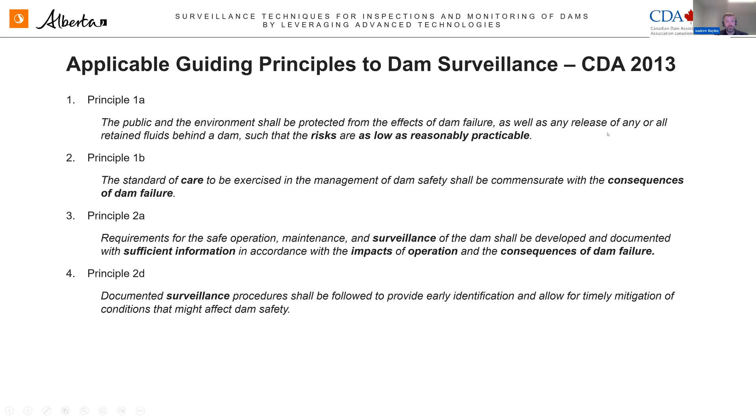So in terms of current surveillance practices, obviously there's a lot of documentation available within the industry. Because we are talking about this from the context of Alberta dam safety, we do tie back into the Alberta Dam Safety Directive, and also the Canadian Dam Association guidelines and the relevant technical bulletins as well. There's also the ICOLD documentation, which is ICOLD Bulletin 158, which provides a lot of really good content. And there's a lot more documentation out there, like Monitoring Dam Performance, which was an ASCE document, and various other bits and pieces.

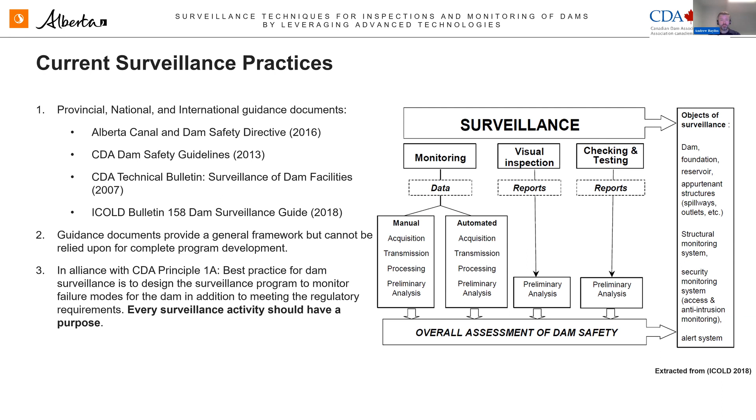So in terms of continued improvement in surveillance practices, they obviously need to be improved upon. There is a need to increase information in the project database as the project evolves. There will always be new issues. There will always be new failure modes that could be identified at any time. And we also want to reflect the fact that there are many dams in Canada, in Alberta and throughout the world as well, which are reaching the end of their design life, and they are aging infrastructure. They are aging assets that require continued surveillance, improvements in technology, and so forth.

And as we recognise, improvements in technology are being undertaken on an ongoing basis. Even in my last 20 years of experience, the leaps and bounds the industry has made has been pretty remarkable. And it's obviously going to grow even more when we move into more artificial intelligence technologies. We have more processing power, we have more digital technologies as well. And obviously the scale of these technologies moves into a more usable and more palatable scale. And next slide, please.

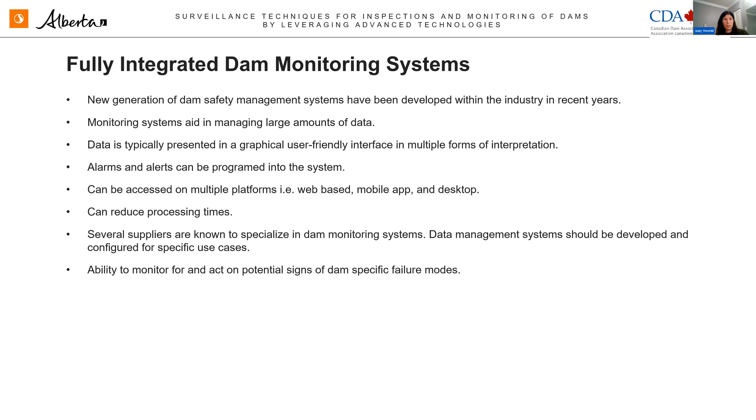So there are several suppliers that are known to specialize in dam safety monitoring systems, as Andrew mentioned, we're software neutral. The important thing is that the data management system should be configured on an individual basis for that dam's identified failure modes, the dam history, the construction, all that information for what you're doing. And then you also have the ability to monitor for and act on potential signs of failure modes. And these systems can also be developed on an individual basis and built in-house. You just need the correct IT support.

So a little bit on digital inspections. Having an experienced dam safety professional's eyes on the dam is a critical component in dam surveillance, and it really forms the effective backbone of a dam safety management system. Inspections and surveillance were discussed heavily on a CDA webinar that took place in February 2021, so I'm not really going to get into the details because that webinar is available online.

You can set up the forms to walk you through each step of the inspection. If you have multiple dams, different dams can be set up with different forms, so you're walking through the same thing every time. If there's any identified seepage issues at a known dam, you can incorporate that into the inspection sheet and say, this is what we need to check. You can also set it up to have automatic calculations. If you're taking a water level reading, you can set up automatic calculations.

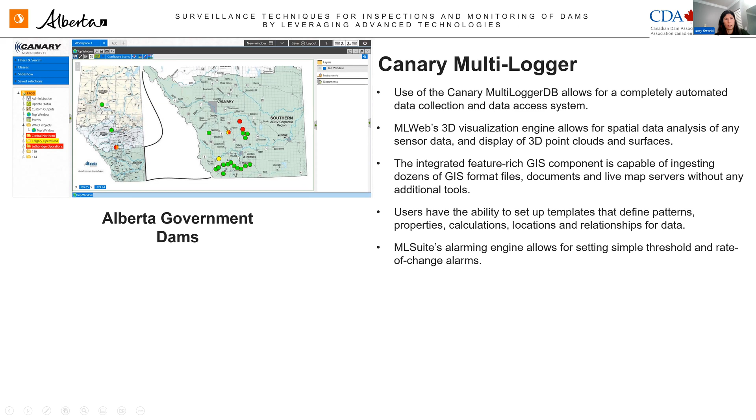You can then point and click right into a specific dam site, and you're really getting that 2D or 3D visualization of the dam right on the spot. We can see here that we have instruments installed at the emergency spillway and fuse plug, the spillway itself, and the embankment. We can also see that red mark on the embankment, which would indicate that there's an instrument within the alarm levels in that area.

We can also click right into the spillway area and see the exact locations of those installed instruments, and they are color coordinated, where the blue titles represent pore pressure monitoring instruments, and the red titles represent deformation instruments.

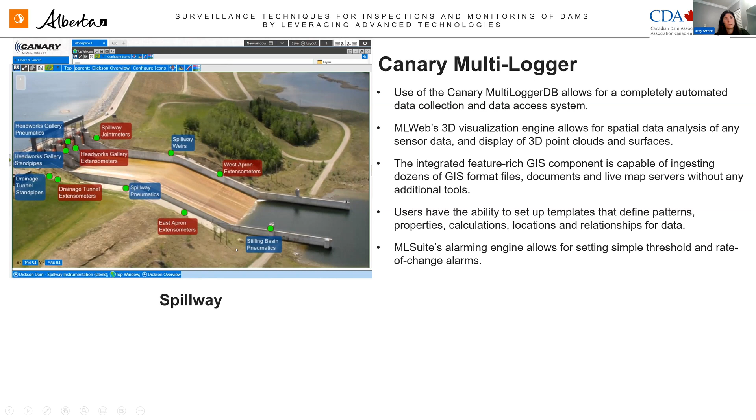And then, as I mentioned, there are multiple forms that we can set up for that graphical review of the instrumentation. We can visualize them grouped by cross-section, by area or by type, depending on how you want to interpret that data. So you can really interpret data in different ways that maybe you weren't doing before.

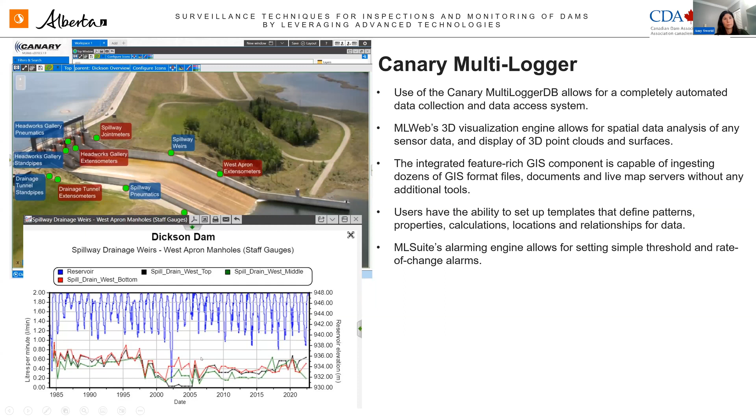So DAMSat. DAMSat is a monitoring software which provides regular dam monitoring using satellites. It uses a combination of InSAR and GNSS to monitor movement. And also there's in situ displacement sensors to really monitor those abnormal behaviors such as movement or seepage. It also includes optical satellite data with pollution indicators.

And it can also incorporate 10-day weather forecasts, which can be tied to the hydrological numerical models if they're incorporated into the system. So you can really assess if there is a big storm coming. You can actually have that in the system. It will get the forecast and go into the numerical model, and you can assess what the downstream levels would be in a potential failure. So it's a really unique tool.

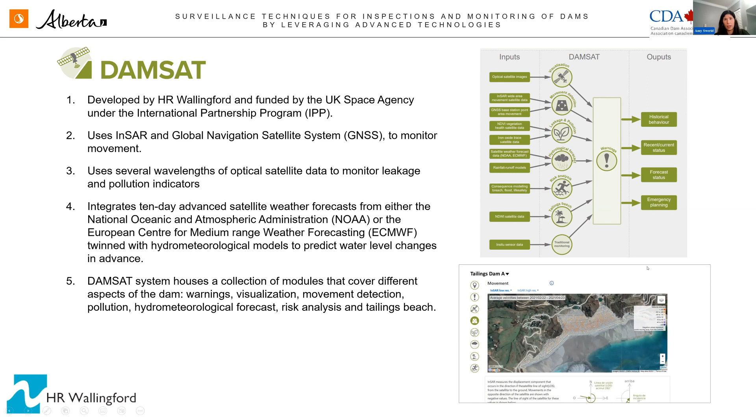The interface does include a number of modules, which are shown on the screen above here. So if you were to log on, you would get the general information, alerts, visualization, movement detection, the pollution indicators. You would look at the hydrometeorological forecast, and then you can also tie into emergency planning as well.

Okay, now I'm going to get into a little bit of topographic mapping technologies. So there's been advances in topography mapping in recent years that can really provide deformation monitoring in ways that we were not previously able to. We're able to get increased resolution and precision using these technologies, which have the capability for us to assess the detailed displacements over a large area as well. And we can also have scans that are carried out at increased time intervals for increased levels of monitoring.

So today I'm going to discuss various types of new topographic technologies, and it's definitely not a conclusive list by any means. I'm not a saleswoman. I'm not going to get into any of the major details on these technologies, and we are very neutral on anything that I'm going to be presenting. But I just want to go over some of the main points of some of the available technologies to maybe give you an idea of something you may or may not have heard of before. And then you can think if this is a technology that you might be able to use at a project in your dam to lower the risks.

So satellite InSAR is a remote sensing technology which is capable of measuring ground displacements with 1 to 2 millimeters precision per year. It has longer wavelengths, which allows the signal to penetrate through cloud cover, fog, rain, or dust. However, snow cover limits the effectiveness of the scanning. Because it measures along a line of sight relative to the satellite orbit, it can have restricted detection on steep slopes. So that's something to keep in mind if you are planning for a dam inspection. And it uses a SAR technique to measure displacements over 2 time periods.

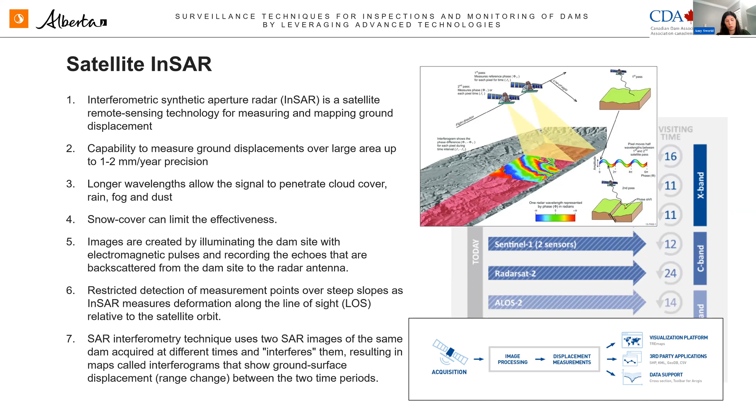So 3VG is a proprietary InSAR system, which is capable of remote monitoring millions of data points in near real time. I'm not going to get into all the details of 3VG, but you can see the image of the platform on the sidebar here. And also they have experience carrying out inspections and topographic mapping for a lot of dam projects. You can see an example here of an embankment survey.

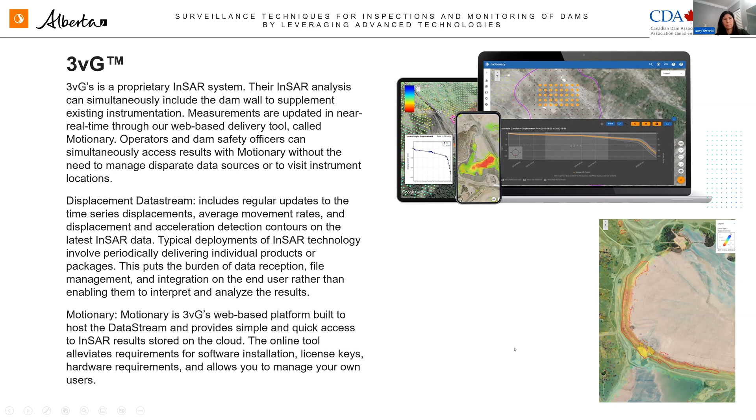So ground-based synthetic aperture radar is a remote imaging system which is capable of obtaining deformations that are less than 1 millimeter, and it's proven to be a reliable remote sensing tool. You can see the setup on the side here. So you would have the radar sensor, the scanning rail, it would be connected to a power module, and then you would have the laptop available for data acquisition.

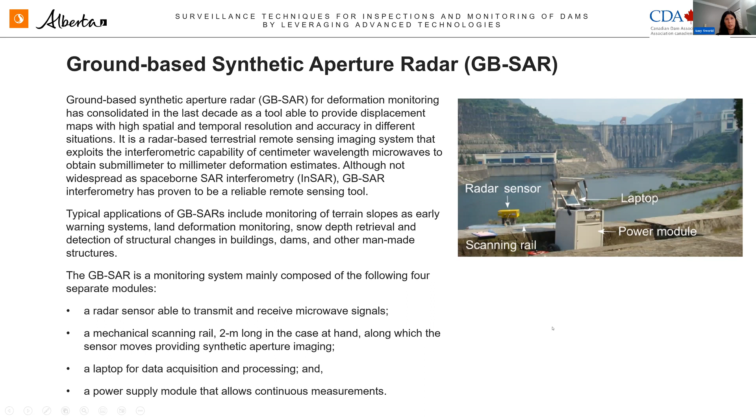Terrestrial laser scanning. It's a contact-free measuring device, and it does require an unobstructed line of sight to carry out the survey. So to carry out a survey for a dam site, you typically need to set up this laser at multiple vantage points around the site, and then the scans would be combined from each vantage point and referenced in spatial coordinates using survey points. And then it also has built-in cameras to allow for automatic texturing. So using the geographic coordinates and the photographic scanning, you really can develop a nice 3D model.

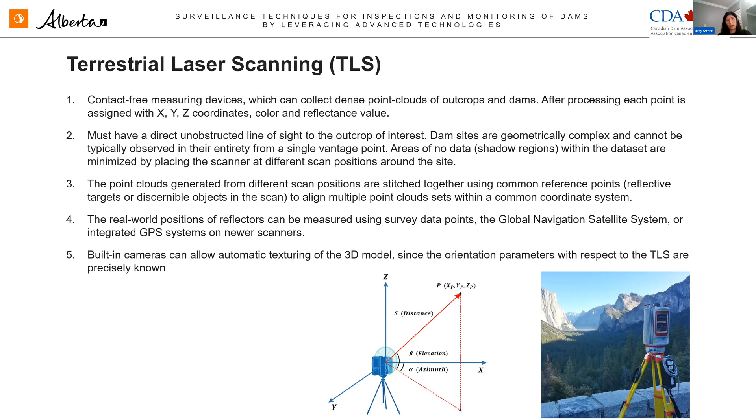So structure from motion is a unique tool that utilizes a series of 2D images to create a 3D component. The images are overlapped from multiple positions using a photogrammetric workflow. And the images are first undistorted using key point detection, which is used to identify key features such as a bedrock outcrop. The key points are matched and created as discrete points in 3D space.

And then there's a distribution of key point matches, which is used to calculate the position and orientation of each image in 3D space. And then those matches are projected to create a 3D visual model. So I have an image here that I found in a previous paper of the 2D to 3D SfM output. So it's a really unique tool that can be used in dam surveillance.

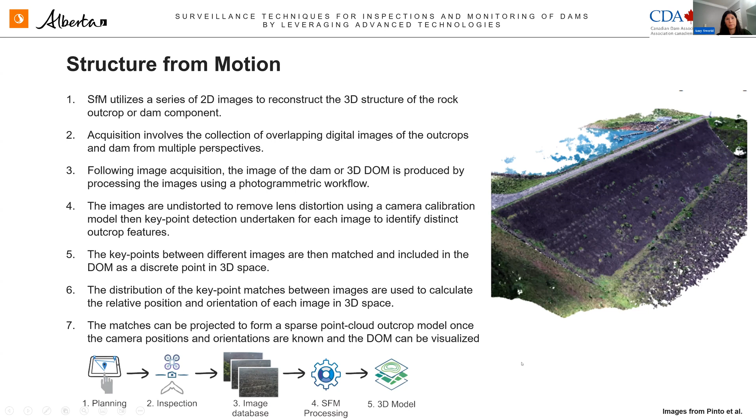So unmanned aerial vehicles. So UAVs, they're becoming more and more common, not only for professional use, but also in recreational use. But they can be incorporated into dam inspections to inspect remote or restricted areas. And then they can incorporate laser scanning as well to develop a DEM. They really allow for a more detailed review of the inspection.

So if you're having a flyover inspection and you have that video on record, you have that record and you're getting the full site. So if you're carrying out a walkover inspection at a later date and you notice something that is different, you can always go back and see that right on the spot. And it's a cost-effective technology as well.

To carry out an inspection for a large dam, you can typically carry it out on a 2-hour survey. And then the cost will depend on the drone that is used, but costs that we're seeing are typically $1,000 to $3,000, including data reduction, to have a survey done. And the cost depends on the area and the drone used, but it's still really cost effective.

The photos that I have on screen are just photos of an active construction site for a dam in Alberta that we're working on. We're having weekly surveys with drone photogrammetry carried out that are tied to control points to develop a point cloud model. So having that point cloud model, we can develop a DEM, which we can then use in AutoCAD. So it's a really effective tool for weekly progress tracking.

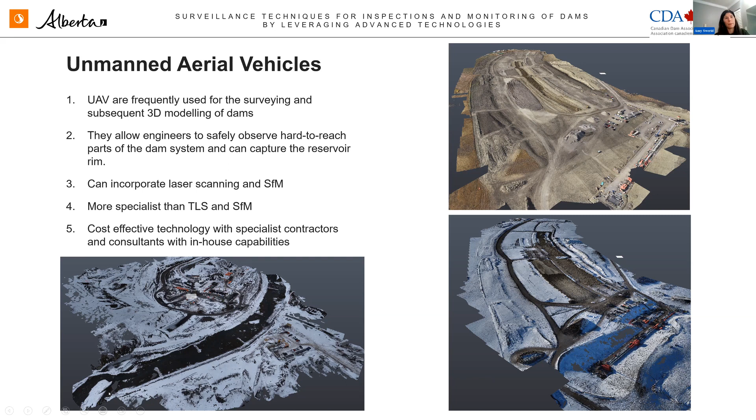So AutoSpecs, it's a proprietary damage assessment software. It uses acoustic frequency data to automatically map and quantify damage such as cracks, spalling, and delamination. It allows users to visualize and assess defects over time. It uses a series of optical imaging, infrared imaging, and acoustic signatures that are able to look for defects that are up to 1 millimeter, 50 millimeters, and 200 millimeters into the concrete. So you can get that into-the-concrete data to assess.

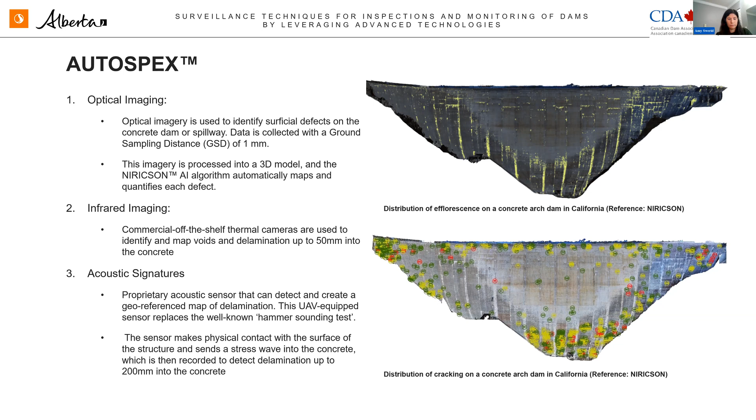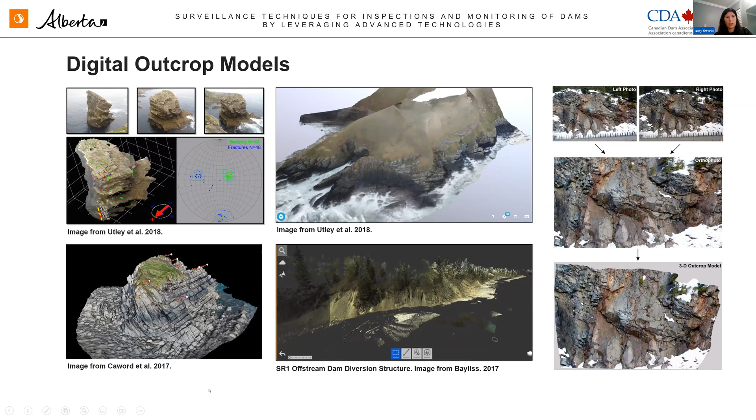And with that, I am going to hand it over to Amy Snedden to talk about instrumentation. Hi, so good morning, everyone. If you bear with me while I try to share my screen. There we go. Hopefully everyone's seeing it now.

Okay, so I want to start just with a brief discussion of instrumentation. This was previously discussed at fairly great length by Savannah Herman of Terra Insights in the 2021 webinar that we've referenced a couple of times. But today I do want to focus on two advanced monitoring options that are available right now to monitor for deformation and seepage. And these are the shape accelerometers and distributed temperature sensing systems.

Okay, so first with the shape accelerometer array, or the SAA. So for anyone who's not familiar with this product, it's essentially an update to the traditional slope inclinometer that I think most of us would have used at some point in our careers. Where it really differs though, is that with the slope inclinometer, you would go out, you would lower down the reader instrument and get that one discrete data point on that one day. With the SAA, you actually get real-time monitoring information, both of horizontal and vertical deformation. But one of the really cool applications for it is that you can also apply it in an arc for monitoring of something like convergence in a low-level outlet.

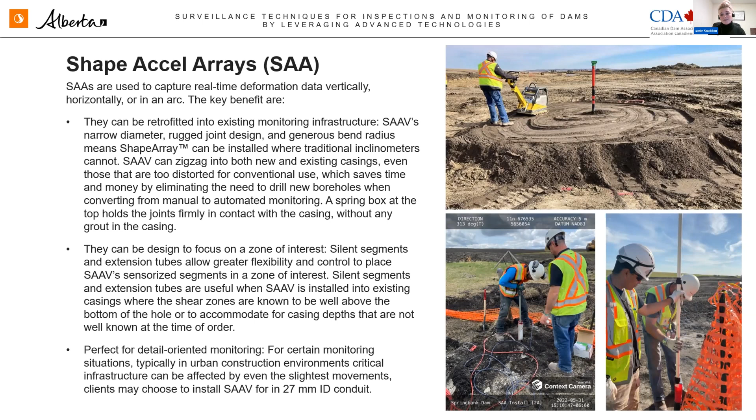Okay, so on to a seepage monitoring system that uses advanced technology, and that is the distributed temperature sensing system. So DTS works using lengths of fiber optic cable that are trenched within the ground and are able to detect variations in temperature. So these cables can be up to 90 kilometers in length from one hub, depending on the system that you are using. The length does vary, so I would encourage you for your individual uses to connect with an individual supplier to figure out which system works best for you.

But the system works using the principle of the Raman effect, where wavelengths are influenced by external forces. In this case, we're looking for changes in temperature, so it's temperature that's influencing that wavelength, which is then picked up by the system. So it can accurately identify very small variations in temperature. The manufacturing information suggests it can go as low as 0.01 degrees centigrade, so incredibly sensitive. And then it can locate those changes at a very precise location along the fiber optic cable.

But why do we care about temperature variation? So the unique thing with this is the product is using temperature variations to correlate to seepage flow. And this has been successfully used across many dams in Europe and has been adopted in dam monitoring guidelines in Sweden. I have been talking to some manufacturers recently for possible application to a dam in Alberta, but as far as I'm aware, there aren't any earth-filled dams in Alberta that currently use this technology, although it has been applied to mining sites for leakage detection.

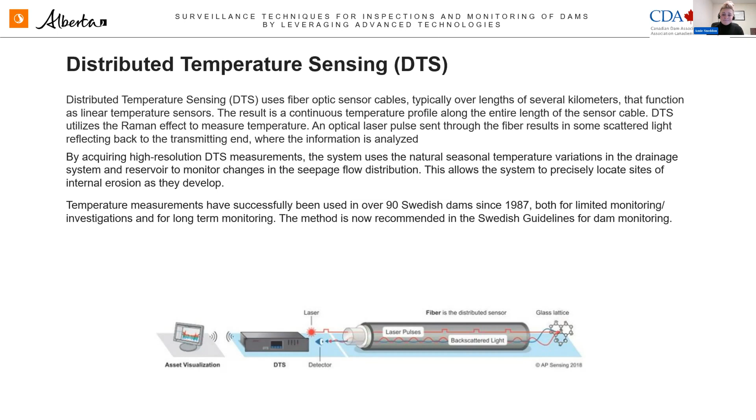Okay, so building on DTS technology, Sensornet have also now developed a special purpose optical cable for dam monitoring, which is the distributed temperature and strain sensing system. So it's kind of in the name, but as you can imagine, the cables are monitoring for both change in temperature and change in strain. So it's doing this by using 3 separate measurements: temperature compensated strain, strain without temperature compensation, and dynamic strain distribution.

And it's taking these readings based on the same principle as I'd mentioned before, where an external force is impacting wavelength. In this case, it's looking for strain and temperature. So the changes in strain are then used to estimate deformation along the fiber optic line. And these cables are limited to around 10 kilometers in length, although I do believe that Sensornet are working to increase this coverage. There have been 2 successful trials of the system completed in Sweden that were reported on some case studies in Sensornet's website.

And I would encourage people to read those case studies. They are incredibly interesting and give a good background on the product. But the first of those 2 trials was unsuccessful. I think there was some damage to one of the cables and the strain sensing wasn't operational. So some tweaks were made to the system. The cable was made more rugged. And then the second trial was a success and predicted movement and seepage in line with existing instrumentation on the site. And it is considered appropriate for use in earth-filled dams now.

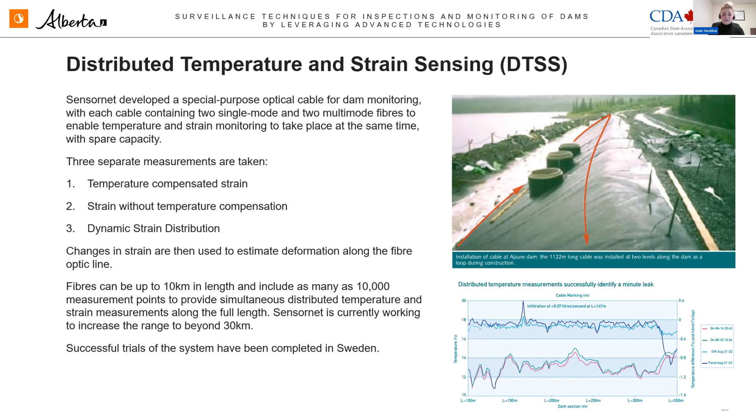Okay, so a data management system that's related to the DTS is XCT. So this is a product which, similar to the ones Amy discussed, are exporting real-time data from site and then presenting a visualization of that data. So it presents both a visualization of the temperature and of the interpreted flow data. So I think that's the key piece with this one, is it is showing that interpretation of data. So the live data can be reviewed with no need for mobile equipment or anything. It can be used via a web interface.

So there's no need for investment in any additional equipment other than the installation of the DTS system itself on your site. One of the nice things is that data from XCT can be exported into an existing data management system. So say if you're using something like Canary on your site, you can export data from XCT into Canary so that you can see all of your instrumentation data in one place. As with something like Canary, you can also set alarm levels in XCT so that notifications can be sent to the appropriate people and the proper procedures can be put in place.

And that brings me on to, I think, a really interesting discussion point on DTS and DTSS systems. As I mentioned earlier, we don't have any installed in existing dams in Alberta, as far as I'm aware, and I think one of the key reasons for that is constructability. So as you can imagine, because it's a length of cable, there does have to be some level of trenching involved to install this system.

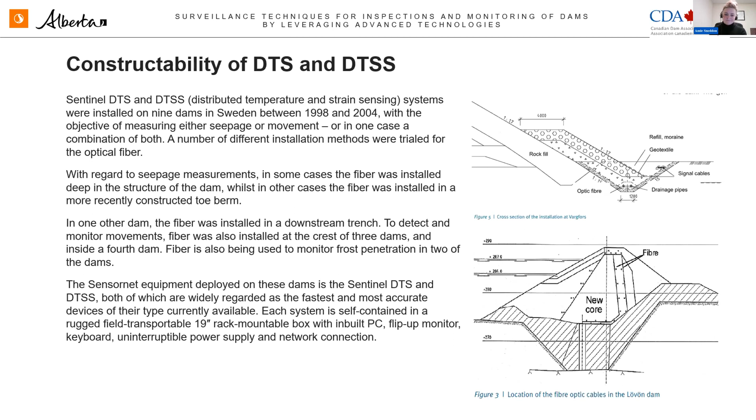Okay, so looking to the future of advanced technologies, as Andrew mentioned, we're really in the early stages of adoption for artificial intelligence, but we have seen some advances recently that are applicable to dam engineering. And after I've given a general overview of what artificial intelligence is, I'll get into that.

Okay, so I feel like this is a subject that when we say artificial intelligence, it's not abundantly clear what we're talking about. So I just wanted to give a brief description of what we're generally referring to. So artificial intelligence is a computer system that's able to perform tasks that normally require human intelligence, such as visual perception, speech recognition, decision-making, and translation between languages.

Where we're seeing applications of artificial intelligence right now is typically the subset of AI, machine learning, and that studies computer algorithms that improve automatically through experience. So some examples of that we'd see in the world right now would be things like self-driving cars or the assistants that we have on our cell phones, such as Siri. So one example I did find that wasn't directly applicable to dam engineering, but is somewhat dam engineering adjacent, is what NASA is doing with AI right now.

So NASA is using AI and machine learning to sift through years of data and imagery to rapidly and efficiently find relationships that would be impossible for the human eye to detect. It's also sorting through years' worth of data in a short span of time, which would really be impossible for a human being to do.

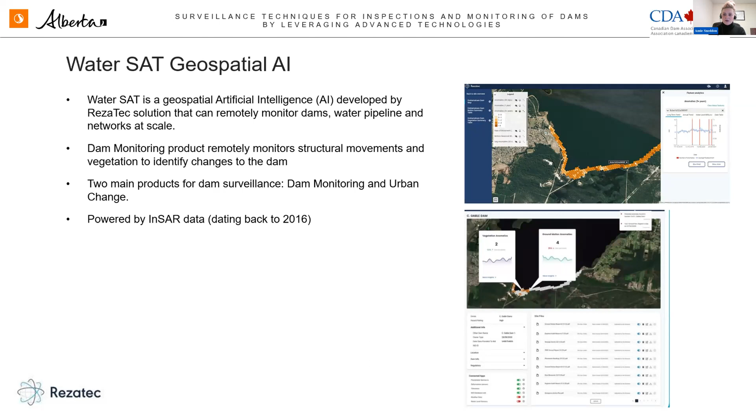The first is drone photogrammetry. Sorry about that. Good enough. Is it being utilized for quantity survey work on the active dam site?

And any of you can jump in. Maybe you want to turn on your cameras and audio. I can answer this one, Jenna. All right. So yes, it is.

We've been using drone technology extensively throughout the project. We use it to define the quantities, check quantities. We reference this consistently with what the contractors are giving us. And we use it to derive quantities for payment and so forth. There's other applications as well, but for the purpose we're using it on that project, it's served its function and has made our cost estimation and our cost progress estimates a lot more streamlined than in the past.

Okay, thank you. The next question is about the monitoring systems. Are they effective for snow-covered dams in wintertime? I think I need a little bit more information on the question. It would depend on the sensor type. The monitoring system in the sense of database management, that would be reliable year round. And in colder climates, you would obviously have batteries that you would have to be checking. As for snow cover, it kind of depends on how you're carrying out the survey. Some methods would be and some methods wouldn't be.

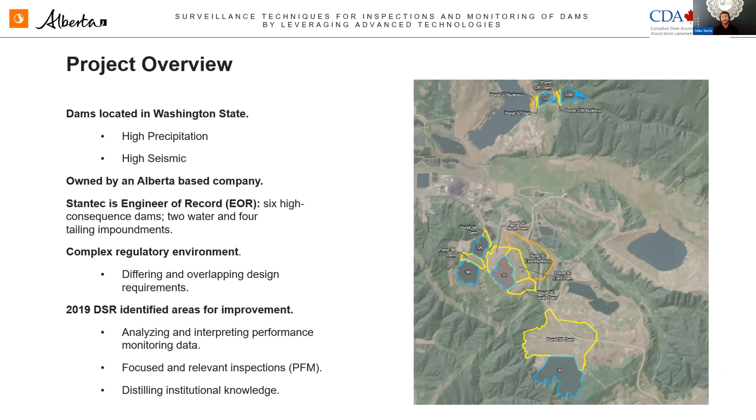So in 2019, we completed a dam safety review of the dams on the site and found a few areas for improvement: analyzing and interpreting performance monitoring data, focusing the inspections on relevant items, potential failure modes, and distilling institutional knowledge. So on this next slide, we'll take a little bit of a deeper dive into those challenges and opportunities that we've identified over our kind of 3-year tenure in this project so far.

So really, our opportunities for improving the dam safety program at TransAlta Centralia were getting these inspections focused on the potential failure modes. The regulator had stipulated the inspections to occur at a frequency, and the regulator was very comfortable receiving just a very broad stroke of inspection, a few yes or no questions, but really not digging into the details of what the failure modes were, why we were looking at certain things. So we wanted to revamp the inspection program to really get into those details, so that we could start understanding dam performance at a deeper level.

We wanted to decrease the time between observation and action. Doing a lot of paper workflows has the opportunity to introduce error at several iterations. So we're going out in the field, we're collecting data on paper, we're coming back to our offices, we're transferring that data into a spreadsheet, and then possibly from there, we're even transferring that data to other stakeholders and consultants who are then transferring that data again into their own spreadsheets. So we're looking at 4 or 5 touch points for any given instrumentation data or inspection data that's coming out of the field. We wanted to decrease the opportunity for errors to be introduced there. That also helped us to decrease the time.

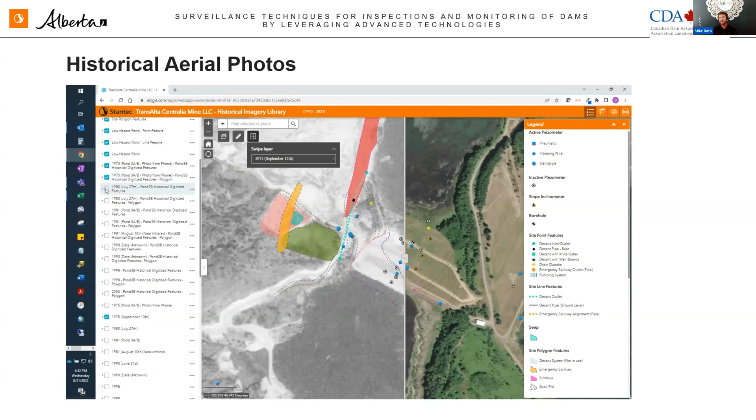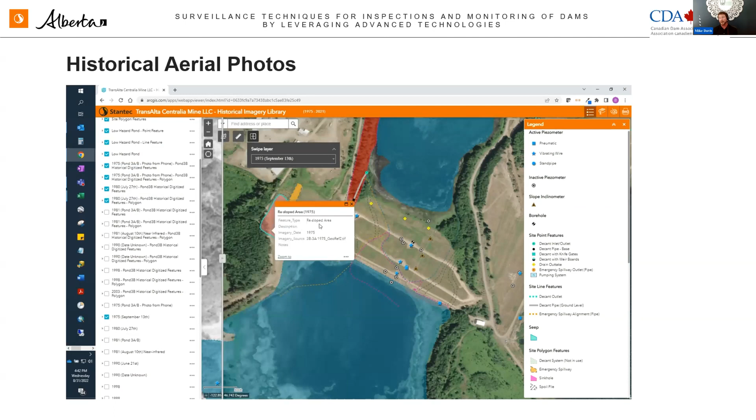So this can be really an insightful way of using information that we already have to really paint that picture of how a dam was constructed, where performance issues may be occurring, and really why that's happening. So this has been an incredibly helpful tool with no additional cost of getting the data. It's just using that historical data in a much more effective way.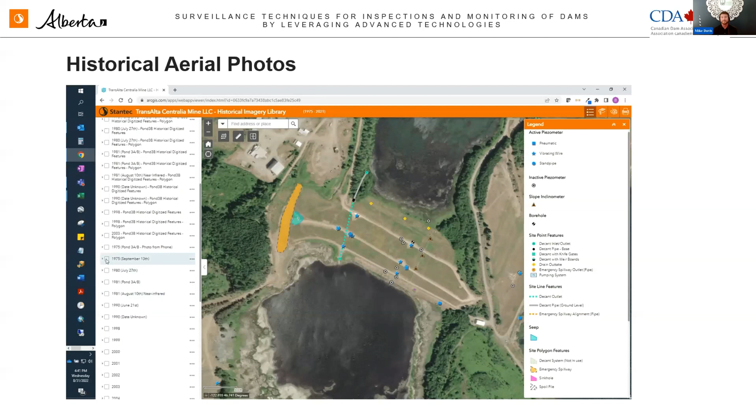Amy talked about tailored inspections, where we're going in now and we're building these digital inspection applications based on the potential failure modes of each dam. And that is really critically important. We don't want to be going out and spending our time on inspections just completing a checkbox exercise.

We really want to get into the why of the inspection and looking at, what are my early indications that the potential failure modes are advancing? What can I look for to determine if this dam is performing as it should be? We've developed all sorts of checks and balances in the inspection forms. A lot of the text that you're probably seeing on your screens is too small to read.

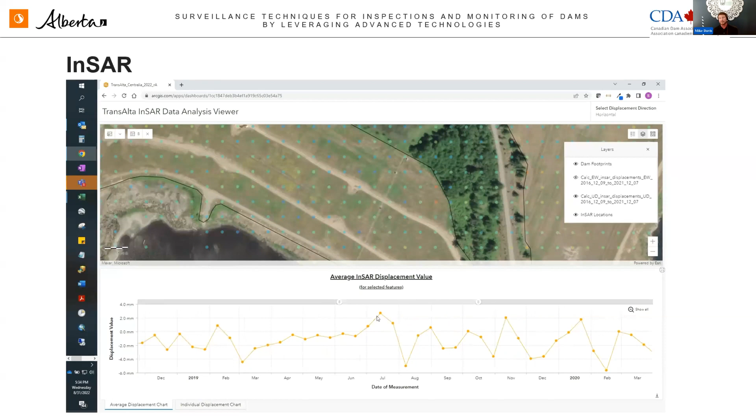That's helped us to get more eyes on the data in terms of our personnel and our clients looking at the data, providing interpretations and understandings that a single person is just unable to make. So really, we're increasing the value we're getting out of these InSAR data sets by leveraging really simple tools to get this data out to a wider network of people.

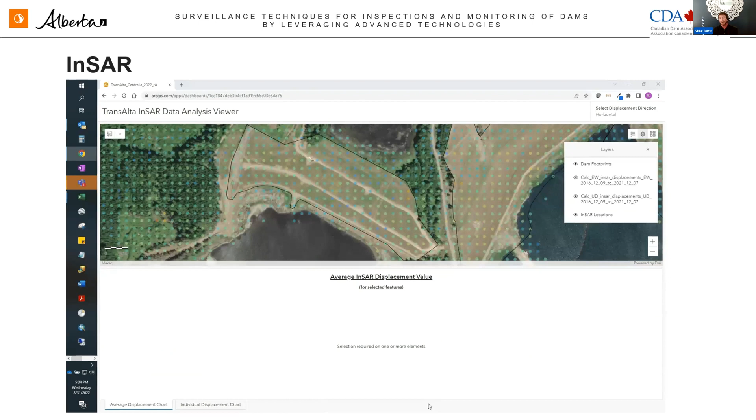We've used this to help orient new staff coming into this project, where, instead of just giving people reports to read, we're now giving them access to our GIS, and they're able to go in and look at things in 3D and really start to visualize what's happening on site. It's been an incredibly valuable tool in that respect as well.

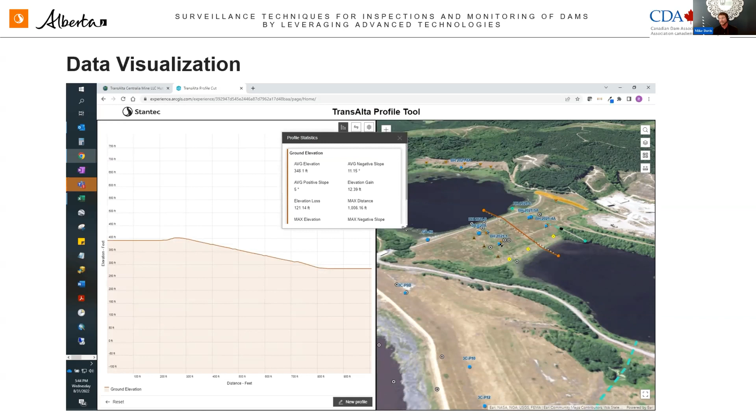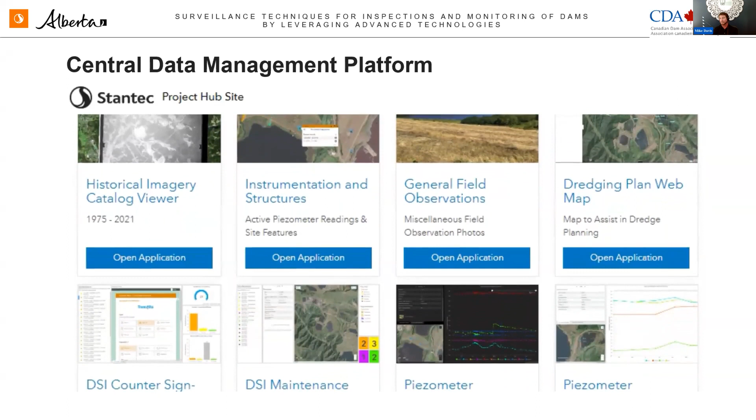A lot of times our regulators aren't as familiar with the site as we are, and this really helps us to get ideas across to people that may not be as intimately involved in the project as we are. And really finally, just coming back to having all of our data in one place, being able to access it really easily by people remotely across the country.

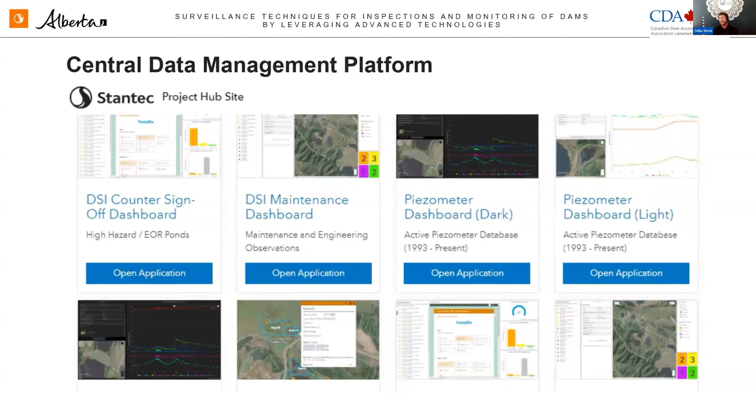Our engineer of record, she lives and works in Calgary. The site is in Washington State. I'm in Charlotte, and we're all coming together in one central platform with access to all of this data in real time.

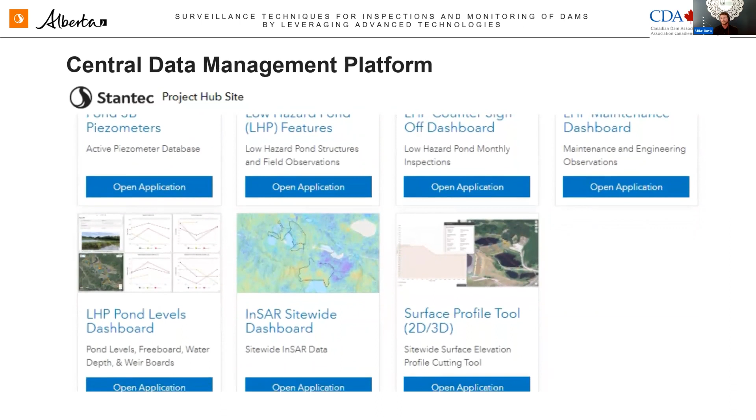Just a couple final slides on resource requirements and basic costs. All of these applications were built by GIS professionals. That includes people that just have an interest in GIS and are proficient with it. One of the great things about a GIS is you can build it a la carte.

Some of the applications I showed here, they weren't all developed at once. We didn't start the project with the vision of having all of these applications. They were built as add-ons to each other. We would build one application, which would start to generate different types of questions, and we would find and build another application to solve those questions, and it kind of just snowballed like that.

So really, on average, we're looking at an application can be built and refined for $10,000 to $20,000. Annual software subscriptions for GIS systems are anywhere from $1,000 to $3,000 a year, and that's for a relatively small user group of 5 to 10 users.

A lot of companies, a lot of our clients, a lot of consulting companies that we work hand in hand with, they already have GIS subscriptions, and this helps us to really integrate our data with the data from others. There's not a lot of proprietary stuff that goes on in a GIS, so transferring that information between parties becomes really simple and easy, which is another benefit of the systems. So we are really enjoying the technology and advancing it continuously as part of our dam safety programs.

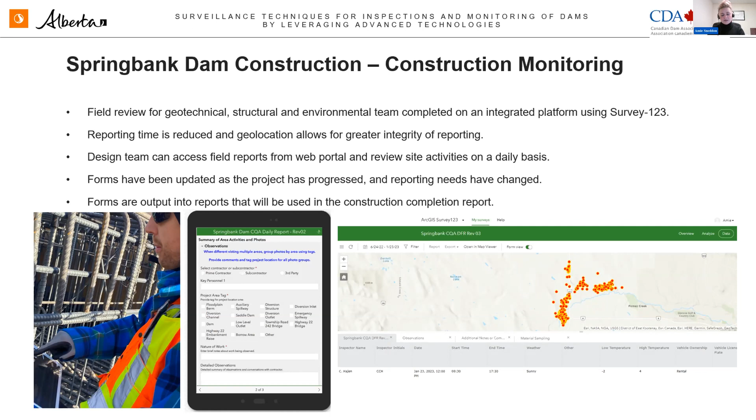Once the inspections are complete and the forms have been reviewed, they can also be easily exported to a PDF format that we have specifically designed to meet the project reporting needs. And we can then provide these reports to the client to meet the daily reporting requirements as part of our contract. And they can also be incorporated into the construction completion reports to meet the requirements of the Alberta Dam and Canal Safety Directive.

Okay, so on to instrumentation. As you can imagine in a construction site, our real focus with the instrumentation program out here is the short-term monitoring during the embankment placement and also in the diversion channel excavation to confirm that the performance is in line with design and to confirm slope stability during excavation. After handover of the structure to Alberta Agriculture and Irrigation, the instruments will then be adopted for long-term monitoring.

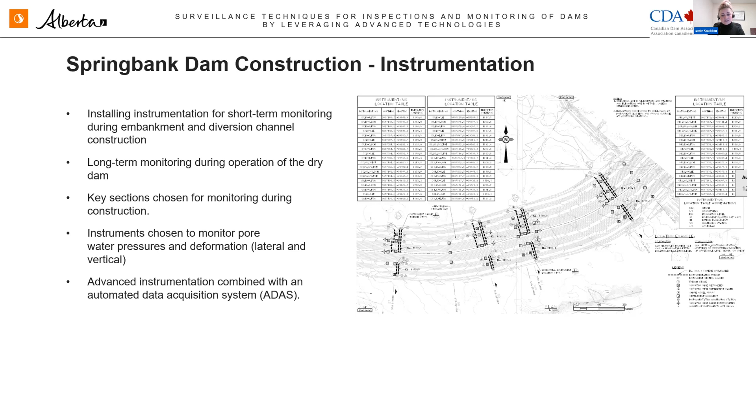And just to give you an overview of what we have on site, there are 6 instrumentation sections within the diversion channel and 9 sections within the embankment dam, both of which include instruments designed to monitor pore water pressure and deformation. And then all of the instruments are either linked or are being linked to an ADAS system to allow for real-time monitoring.

Okay, so that being said, what have we actually installed out on site here? So in the diversion channel, we have vibrating wire piezometers or VWPs to monitor for pore water pressure and SAAs to monitor for lateral deformation, both of which could be indicators of a stability issue that poses a risk to construction workers or equipment that are present in the diversion channel base or within the diversion inlet during construction.

In the dam construction zone, similar to the diversion channel, although we're monitoring for slightly different reasons, we also have vibrating wire piezometers. In this case, we're monitoring for excess pore water pressure during fill placement, and also shape accelerometer arrays to monitor for possible developing stability issues as the dam construction continues and we reach higher elevations during construction.

In addition to those two, we also have vibrating wire extensometers and vibrating wire settlement plates, both of which are monitoring for vertical deformation or settlement during fill placement. All of the current instruments that we have on site have been placed within the dam foundation, and as construction proceeds, instruments will also be installed within the dam fill. And as I mentioned, all instrument sections are linked to data loggers, which transmit to the site communication hub via radio and then ultimately to the project ADAS system.

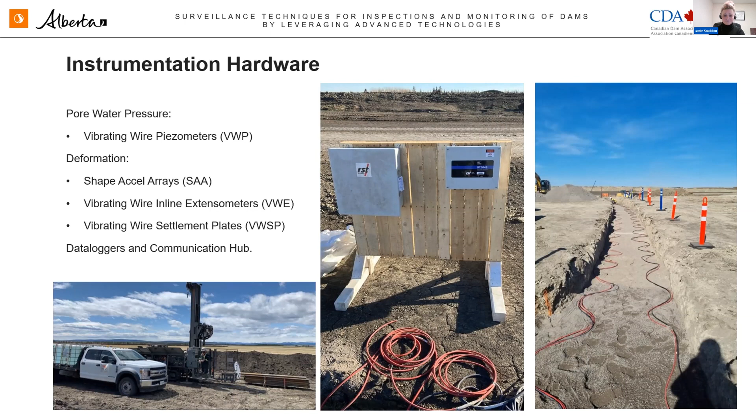Okay, so the project ADAS system that has been selected by Vinci for use on the project is Beyond Monitoring by Sixense. As you can see here, it's similar to the other data management systems in that it's taking our data from site and presenting it visually on a dashboard. The ADAS system is currently in the preliminary stages of launching, with only the data from the instruments being available for review right now. But we are working with Sixense to update this system to meet our project requirements.

And in the near future, we'll be seeing things like instrumentation elevation and fill elevation on the VWP plots, for example. As well, an interactive plan will be added similar to the system that Amy showed earlier when discussing Canary, which will allow us to have a 2D overview of the site, be able to click down and look at areas of interest. So for example, if I know that fill has been placed on section D11, I can focus on that specific instrumentation section and look at information from the instruments on that alignment to monitor for the response there.

Alarm levels have currently been set for the shape accel arrays, which will send automatic text messages and automated phone calls to key members of the Vinci construction team. And that allows us to react to any possible signs of stability issues and to react accordingly with Vinci's health and safety team out here. We're also currently developing alarm levels for the VWPs at the moment so that we can get similar notifications during construction in case we have to take any action in terms of the volume of fill being placed or the rate of fill being placed.

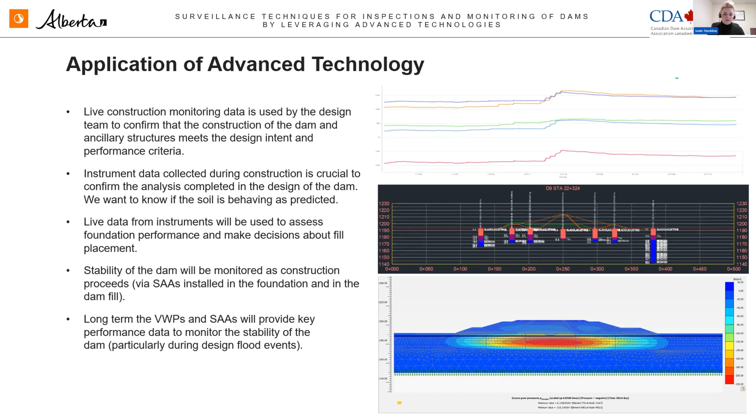Okay, so I do want to touch a little bit on the cost of applying the advanced technology, but it would be really disingenuous for me to present the cost from Springbank, because we are only part of the way through the project. And because of the way the contract has been broken down, it's really difficult for me to bring out the costs of individual components on the site. So I'm going to be focusing on my experience and application of some of these systems in Alberta in general to provide some idea of costs.

So the Survey123 forms were developed using existing infrastructure available to Stantec staff, so there was no need to build a background database to power our forms. So it took us very little time to create and update those forms. Our staff also utilised pre-existing equipment such as iPads and iPhones. But that being said, the cost to set up a similar system with just field reporting forms and a dashboard, we're currently completing for an Alberta client with our digital practice team, and that cost is at around $40,000, excluding equipment costs. One of the nice things with Survey123 is that it is Android enabled, so you can buy tablets relatively cheaply to support this system.

Moving on to instrumentation, the advanced instrumentation costs are in the order of 2 times the cost of traditional instruments, just roughly as a breakdown. So perhaps if we'd installed SIs versus SAAs. But one of the really interesting things out at Springbank is there was a period of time between the commissioning of the instruments and the commissioning of the ADAS system, which meant that we were having to manually download from all of our instruments for a 5-month period.

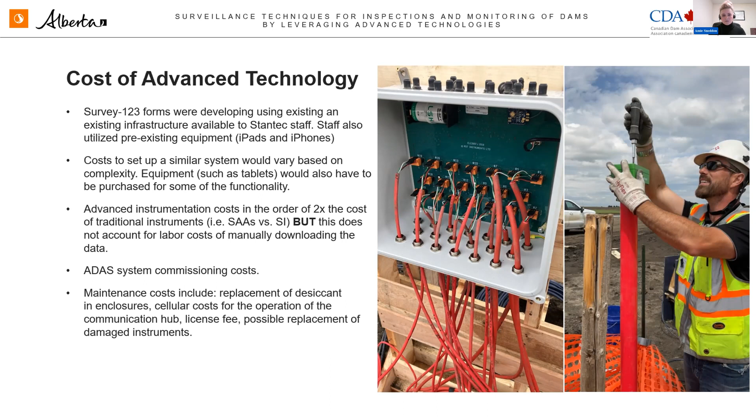So lessons learned from our first year of construction. With the construction monitoring forms, as I mentioned, we did have a couple of revisions made to those. And I think we maybe could have put a little bit more planning into that up front so that we didn't have revisions. Ultimately, the revisions took very little effort to do, but it's something I would consider if I was applying this system on another project.

Also understanding what you're actually going to use field review forms for and what kind of output you want, because you can really tailor that form to match the output you want. Ours fit very nicely with the PDF system, but I'd encourage anyone developing a similar system to think, what's the end product? What's the end goal that I would like to get out of this?

With the instrumentation program, our lessons really came purely from procurement for a couple of items. With coming out of COVID-19, there were some supply chain issues around the data loggers that had originally been specified for the project. Thankfully, there were alternates available on the market that we were able to approve, but if we had to wait for the data loggers that we had originally specified, I believe that would have been up to a 6-month delay to be able to get those to site and then be able to install.

Due to the instrumentation lead times as well, which for an SAA back when we were first ordering the products was around 6 to 8 weeks, the instruments had to be ordered prior to drilling to meet the overall project schedule, which meant that when we were actually advancing the boreholes, some of them had to be drilled slightly deeper to meet the project requirements and some slightly shallower due to varying bedrock depth.

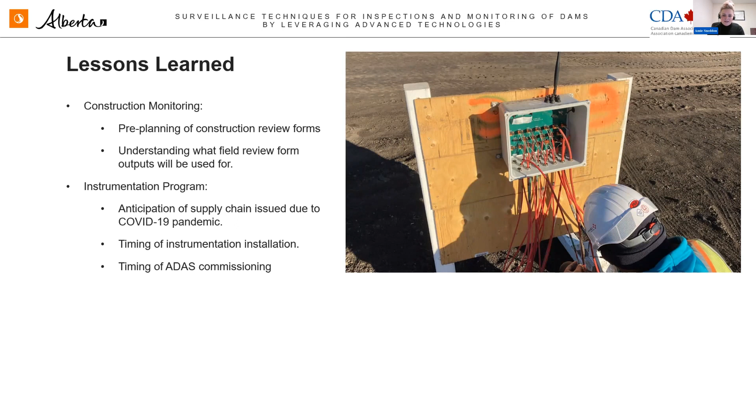And that's all from me, and I'll hand back to Amy. Thanks, Amy. Let's get my screen opened here.

Okay, so the third case study I'm going to present is the development of a digital monitoring for a small dam owner. And I found this really practical for, I think, a lot of dam owners that may not be using a lot of advanced surveillance techniques, or may not have a digital database started. And we presented a lot of advanced surveillance techniques today that I think can be, oh, wow, this is everything that's available and I'm back here. And this is a little bit on how you're going to get into those first steps, similarly to what Mike presented in the first case study.

So just a bit of a project overview. The client was a dam owner in Alberta that owned 395 stormwater facilities. And within those facilities, there were approximately 150 small dams with a consequence classification according to CDA guidelines ranging from low to high. The dam safety management program was in its infancy stage, where they had recently developed a new dam safety monitoring plan.

Surveillance records were limited, where some records were paper copies, some records were digital copies, and some inspection records were maybe not recorded at all for routine inspections. So we were really able to leverage some technology to help develop the dam safety management system. So to help get all the records together in one place, to help with the staff training, and also keep those staff training records, to aid in the surveillance of these dams and the recording of the surveillance information.

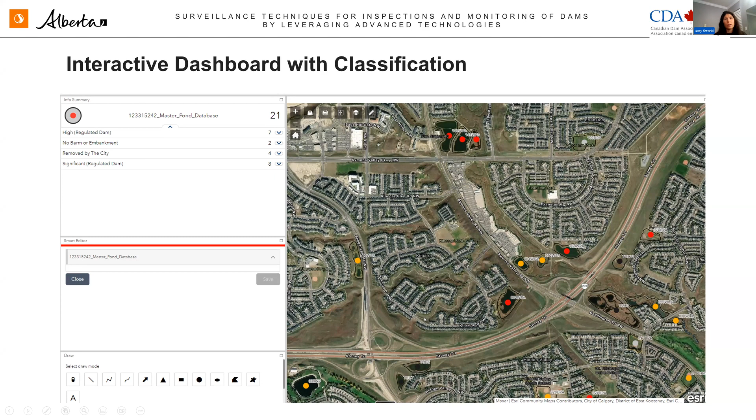So you can imagine just what a useful tool that would be if you're on site and maybe you didn't have drawings printed out, or a feature popped up that maybe you weren't planning to look at. You could just open up the database on your phone or tablet and be able to pull up the relevant information that you needed right there on the spot.

And then, again, understanding that it's a work in progress, we're starting with one inspection app, but it can be tailored for specific dams if you need to implement additional items to look at. It's fully flexible. So this is what we're working on now.